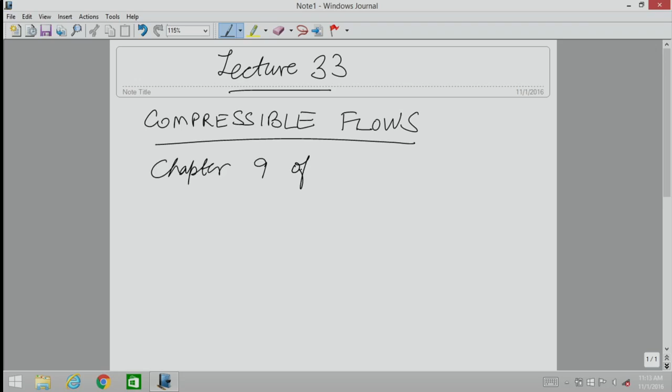Now this topic which I'm starting is compressible flows. This is basically chapter 9 of our book, and we'll be covering up to section 9.6. The parts later than that we will not be covering.

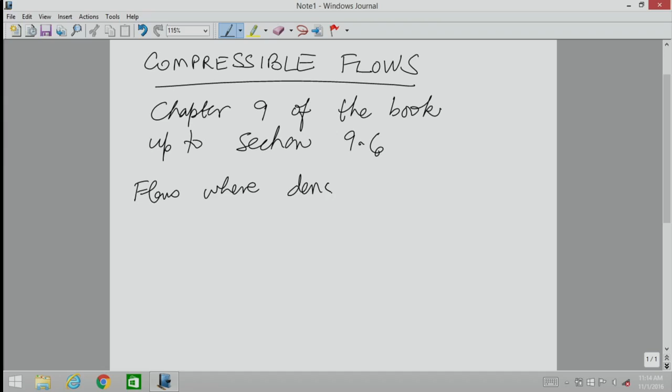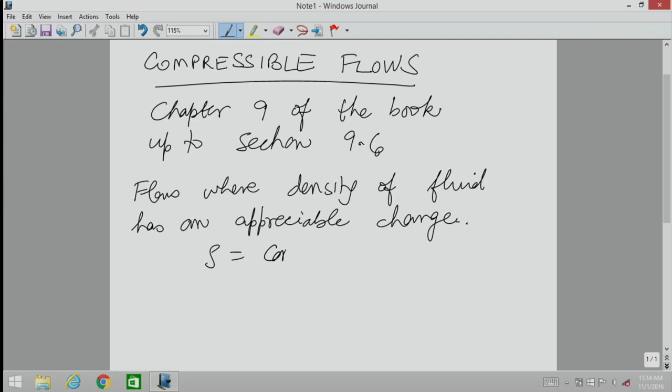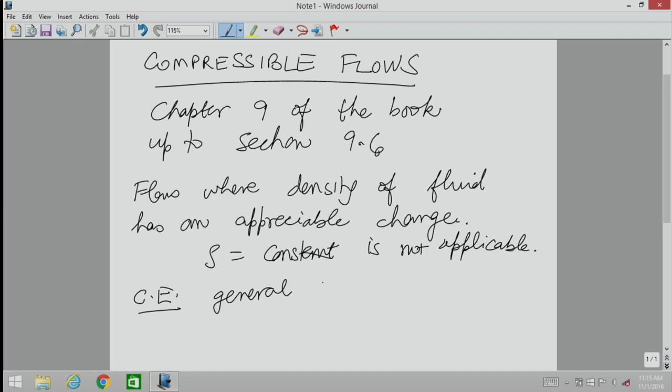Now, what do we mean by compressible flows? Compressible flows mean that flows where density of a fluid has an appreciable change during the flow, which means that density equal to constant is not applicable. So what is the first thing which comes to mind when I say density is constant is not applicable? Which equation do you think we need to modify? The continuity equation. So one of the first things we immediately think is that in this flow, the continuity equation, we have to look at the general form. Del dot V is equal to 0 is not valid.

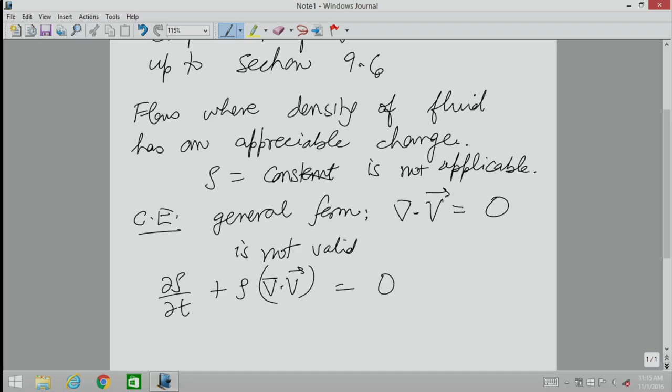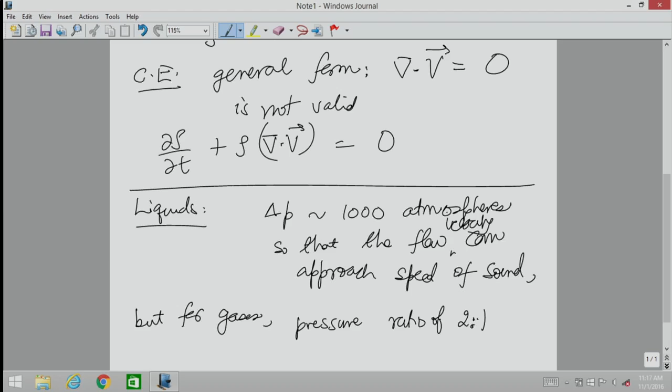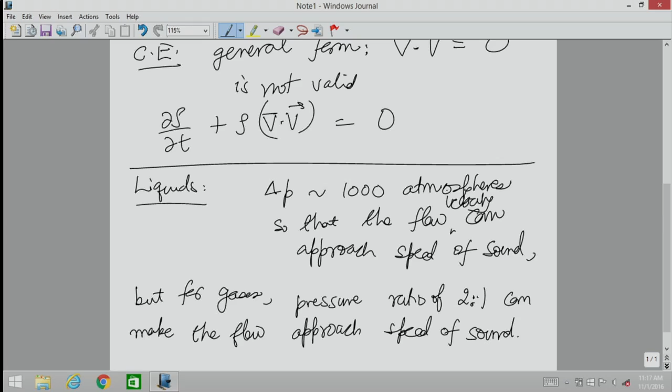Now physically, when we see this, if we look at flow of liquids, we need a pressure drop or pressure change of about the order of 1000 atmospheres so that the flow can approach compressibility in liquids. It will be difficult, or change of density occurs under much harsher conditions. But in gases, if the pressure drop or pressure ratio is about 2:1, it can make the flow approach the speed of sound, and which will make it become compressible.

Now, what speed of sound has got to do with this will become clear by the end of this lecture. But what we find is that there are two effects mainly in compressible flows which are not observed in incompressible flows. There are two of these things which we will find in compressible flows which we don't find when density is constant. The first of these we refer to as choking, and the other one as shock waves, which again we will explain as we go through this topic.

In choking, what we find is, suppose there is a tank and there is a pipe connected to this. If you want to create a flow in the pipe, how do you create that? You reduce the exit pressure. If you reduce the exit pressure, the flow from the tank will start flowing in the pipe. Now you keep on reducing the pressure, and that is where the ratio of pressure comes in. There's an inlet pressure, there's an exit pressure. Now what you find is, if the Mach number in the flow -- because the flow speed increases, the velocity of the flow increases, and as you reduce the pressure further and further, you would expect the velocity to keep on increasing. Now what we find is, once the velocity, assuming this is one-dimensional flow, once it approaches the speed of sound...

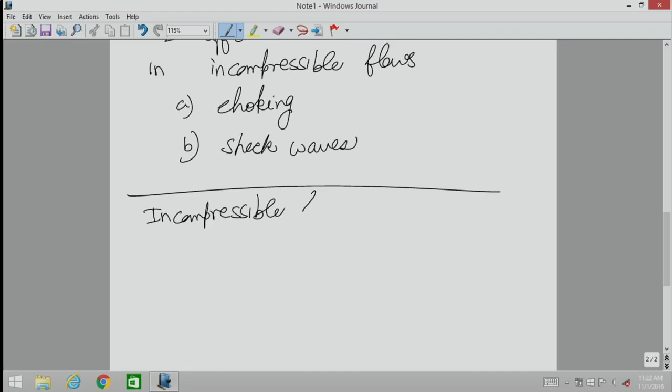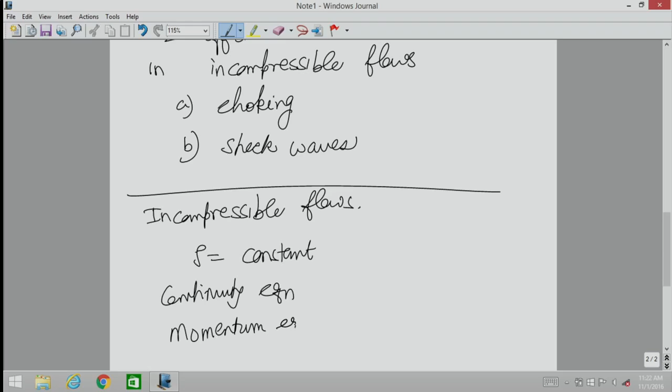So now let us look at our equations in incompressible flows. For incompressible flows, density was constant, so its value was known. There was a continuity equation and a momentum equation, and together these equations gave us the value of V and P. So far, we found the values of velocity and pressure from continuity and momentum equation.

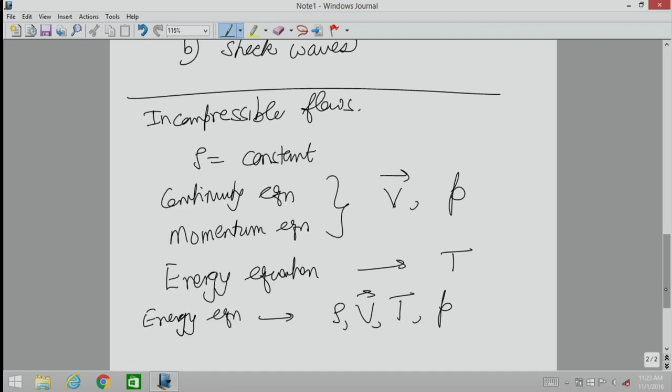Density was constant, and we did not do this, but if we want to find the expression for temperature, we will get that from the energy equation. In incompressible flows, because density is constant, the energy equation is a separate equation for T. The energy equation contains density, velocity, pressure, all these terms. But the equation for velocity and pressure does not contain T. So therefore the equations are decoupled. We can first solve for velocity and then solve for temperature.

But this will not happen when the flow is compressible. Now, as opposed to this, when we look at compressible flows...

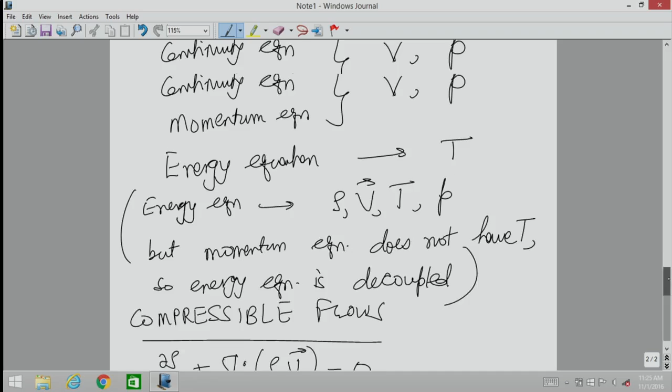I think I wrote the wrong equation there, plus. I should probably correct the starting thing. I think I wrote something wrong there. Please correct this, I made a mistake. It should be del dot rho v. On the first page of the lecture, I wrote it as rho times del dot v. With that, it should have been capital D rho by Dt, not small. So this has to be corrected on the first page also. And here we have del dot rho v is equal to 0.

So now what happens is...

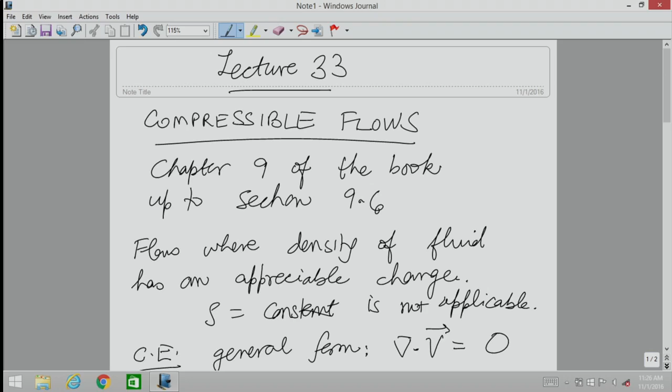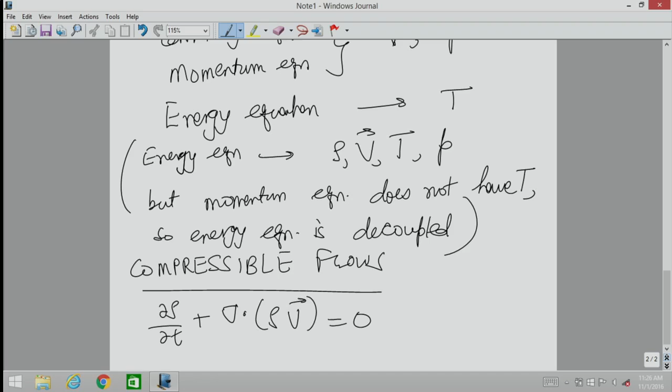So now let's see, if we look at compressible flows, we have this equation for density. This is one equation. Then we have the momentum equation, which will contain V and P, and we have the energy equation, which has an extra variable T.

So now if you look at it, you are short of some variables. Density is also a variable, along with pressure, velocity, temperature. So totally, counting them, there are 6 variables, not counting mu, because mu also depends on temperature, and where temperature changes, that will also come into picture. So we have 6 variables, and we have only 3 equations plus energy, which is a scalar equation, making 5 equations total. So you will need one more equation with these variables.

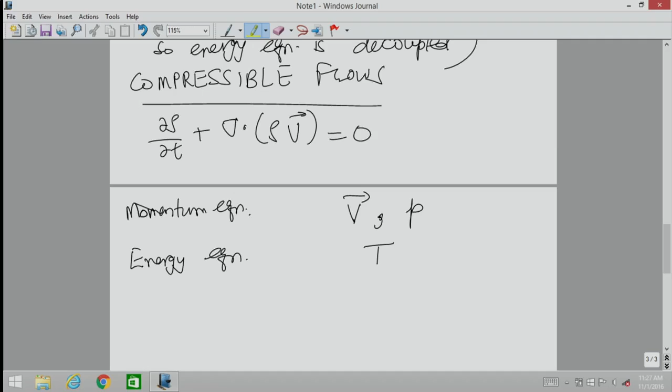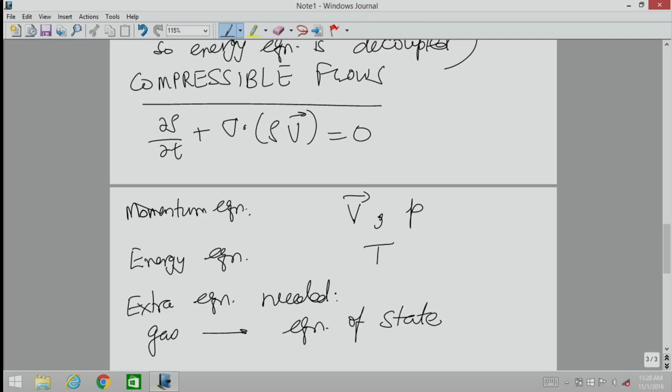And the final equation which we get, there is an extra equation which is needed. For gas flows, we get it from the equation of state, which you have seen in thermodynamics. If we assume that the gas is an ideal gas, then I can use P equals rho times R times T. So the extra equation which relates P and rho through temperature will be this equation.

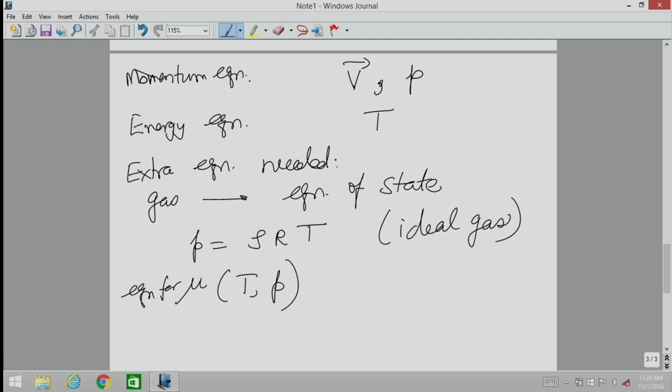Then if temperature changes are important, and pressure too, then we may also need an equation for mu as a function of temperature and pressure. Normally changes of mu with pressure are very low; the main effect is mu with temperature. This we may have to prescribe with another law, sometimes called Sutherland's law of viscosity, which we use. This again will have to be given, because now we keep in mind that as the flow is going, its temperature is changing, its density is changing, and they are changing by big amounts, not very small amounts. So when they change, we have to account for those. That means obviously life becomes more and more complex here.

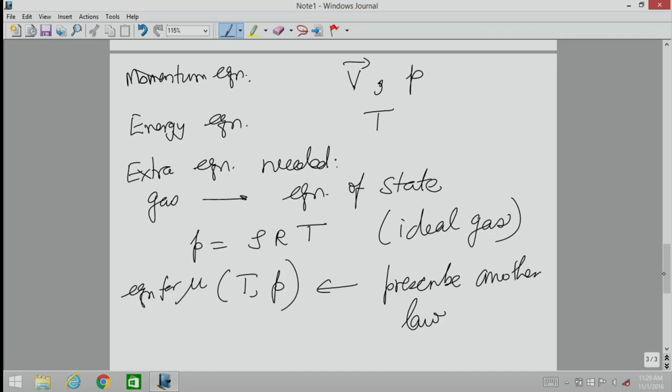So what we do is, because this comes, let's start with a brief review of thermodynamics, and we will assume ideal gases.

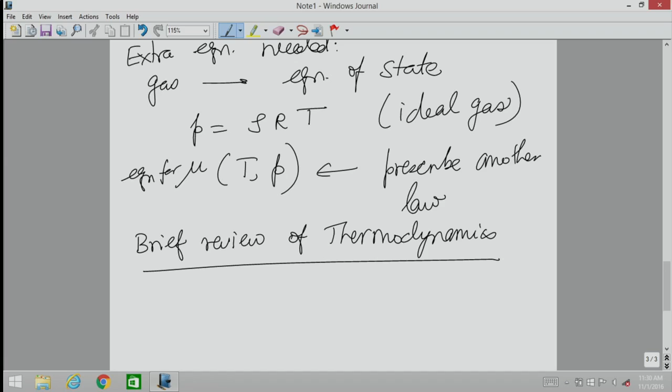You are doing a course on thermodynamics, isn't it? How good is it? No, but what all have you covered, you've done the ideal gases and all? First law, second law, enthalpy, internal energy. You get nightmares of these or no? Not too bad, I don't know. What symbol do you use for Cp upon Cv? K or gamma? K. Okay, good, we'll also use the same symbol.

So once again, when we talk of compressible flow, we'll assume we are talking of gases, and the gas we'll have in mind is air. So basically all problems will involve flow of air. It could be helium or nitrogen or carbon dioxide, anything. All you'll have to do is change the values of K, etc.

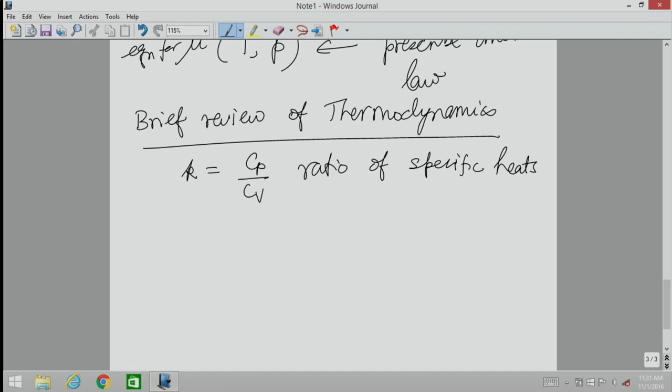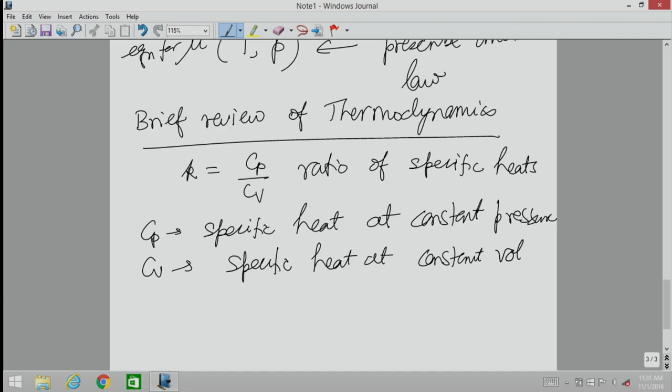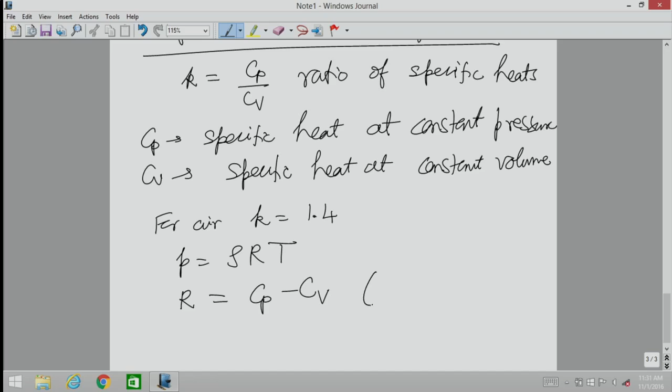But otherwise, first thing we do is we know this ratio of specific heats. What is Cp, what is Cv? Cp is specific heat at constant pressure... and Cv is specific heat at constant volume. And for air, K is equal to 1.4, and P is equal to rho RT. We assume it's an ideal gas, and we also have a relation R is equal to Cp minus Cv, which is a constant.

So now in real gases, K, Cp, Cv change with temperature, but in ideal gases they are constant. So we will assume ideal gas and we'll assume this to be a constant.

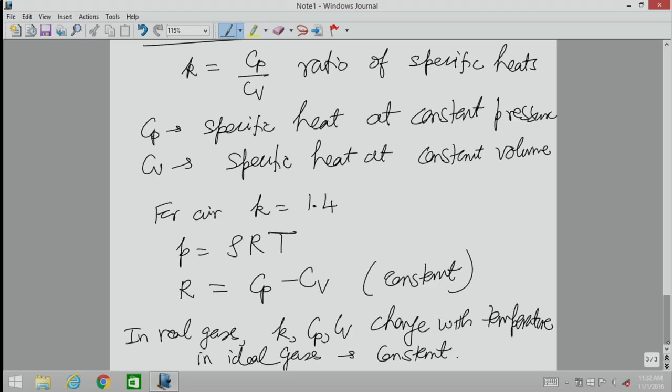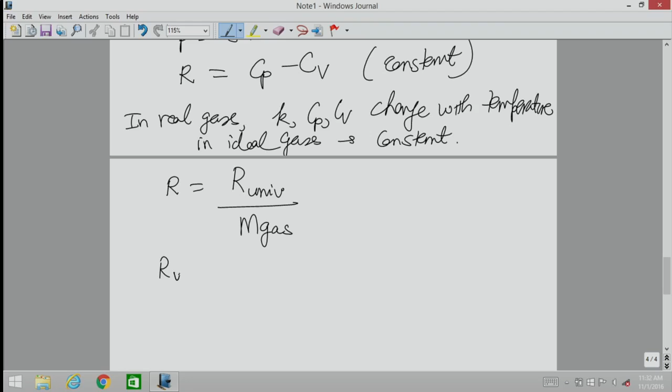Now here R, which we have written, R is equal to R universal divided by molecular mass of the gas. R universal is a number which is valid for everything, it's 8314 joules per kilomole Kelvin, and M is the molecular mass of the gas. And for air, R is equal to 287 meter square per second square Kelvin.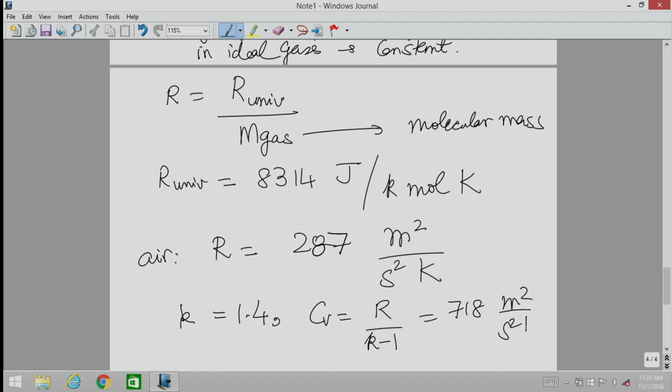K is equal to 1.4. We have this relation Cp upon Cv is equal to K, and Cp minus Cv is equal to R. So therefore we can work out Cv turns out to be equal to R divided by K minus 1. In terms of number, it is 718 meter square per second square Kelvin, and Cp is equal to K times R by K minus 1, so this becomes equal to K times Cv.

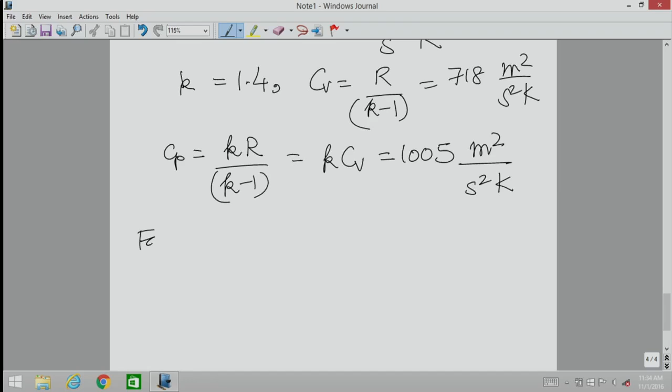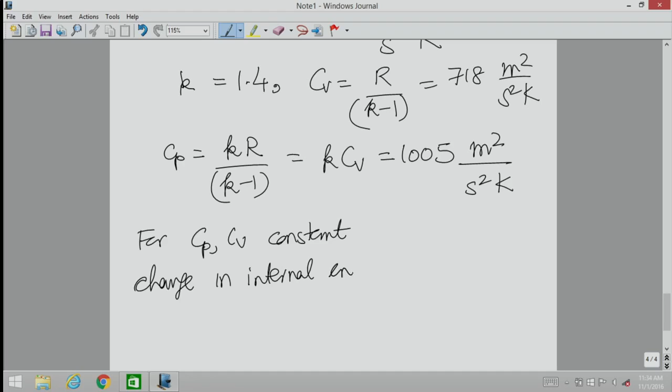Now for constant values of Cp and Cv, we have a relation: change in specific internal energy, U2 minus U1, can be written as Cv times T2 minus T1, and change in enthalpy, H2 minus H1, is equal to Cp times T2 minus T1.

And in case Cp and Cv are not constant, then I should probably put specific, so I'll use a symbol hats here. Then change in specific internal energy is equal to integral Cv dt, and change in enthalpy is equal to integral Cp dt.

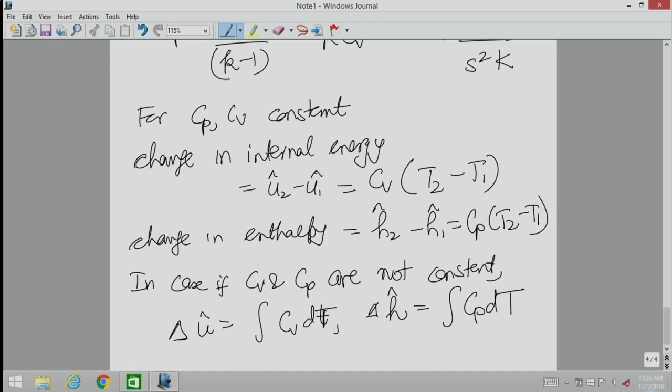So this is, I'm just sort of writing it from your thermodynamics course, I'm not teaching these to you. I hope the details of these expressions have been done by Professor Ravi when he taught you the thermodynamics course. Who is teaching it? Talukdar sir.

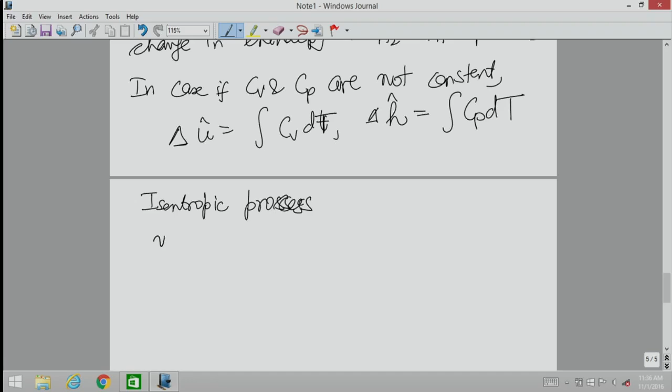Now we also define a process called an isentropic process, and when we talk of a reversible, an adiabatic process - what do we mean by adiabatic? A process in which there is no heat transfer with the surroundings. And if the process is reversible, meaning a slow change is taking place so that it can come back - if it's a sudden change, it's not reversible. Then a reversible adiabatic process is also isentropic, involving another thermodynamic property called entropy, and for this process delta S is equal to 0, where S is the entropy.

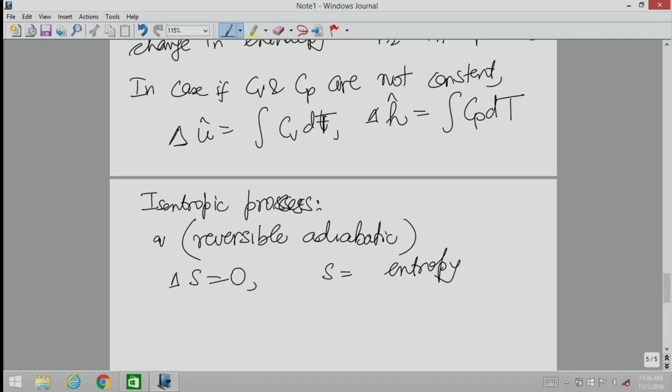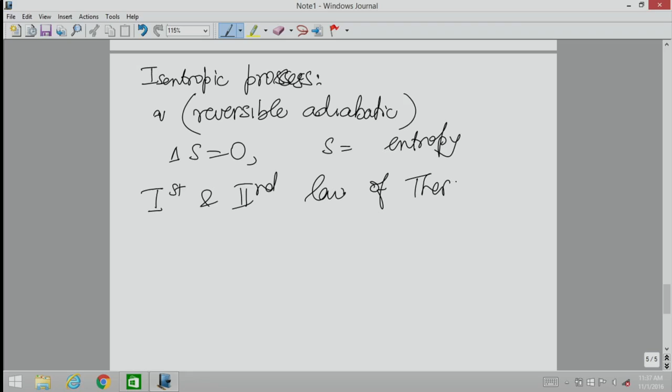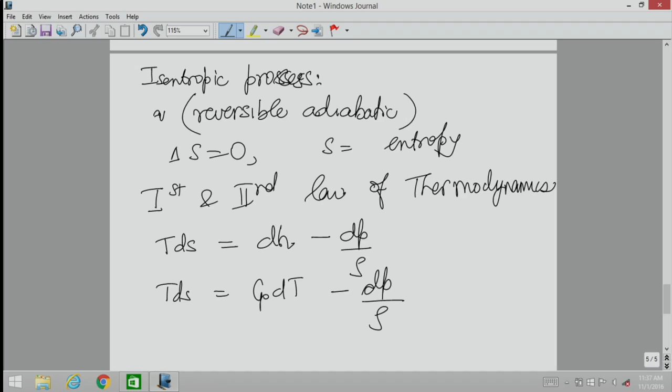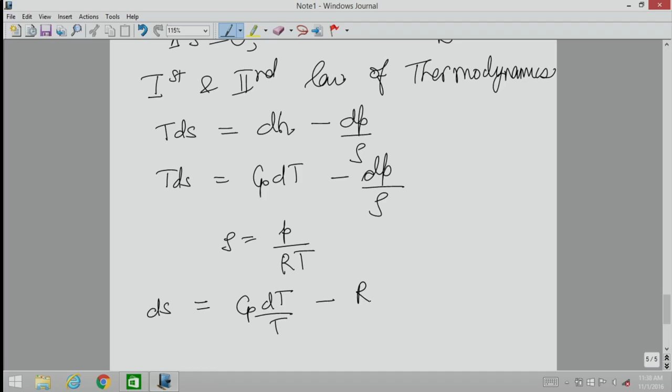Now from the first and second law of thermodynamics, they lead us to T times dS is equal to dH minus dP upon rho, for a reversible process. So we can write TdS is equal to Cp times dt minus dP upon rho. And for rho we can write P is equal to rho RT, so rho is P upon RT. So what we get from here is dS is equal to Cp times dt upon T minus R times dP upon P.

And when we integrate this, we get integral from 1 to 2 of dS, which gives us S2 minus S1. The change in entropy is equal to Cp times log of T2 upon T1, minus R times log of P2 upon P1, assuming Cp is constant. This is for an ideal gas.

And this we can also write in terms of Cv. This becomes Cv times log of T2 upon T1 minus R times log of... Now these two are identical equations. You can probably use the equations we have done, P equals rho RT, to get these things, and then also the relation between Cp and Cv we had worked out.

So from there you will be able to get this relation. These are basically just some things which are a recap from the thermodynamics course. And from here what we get is the change in entropy, and if we have an isentropic process...

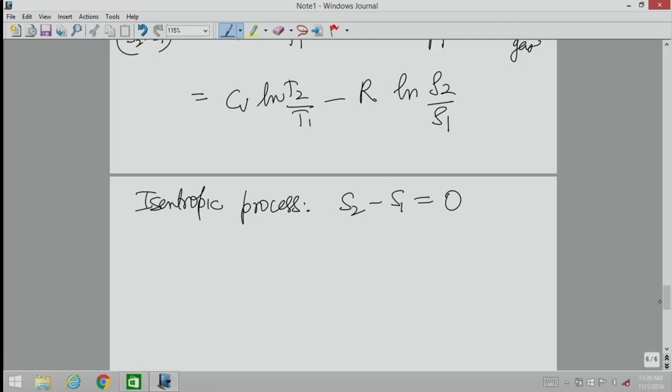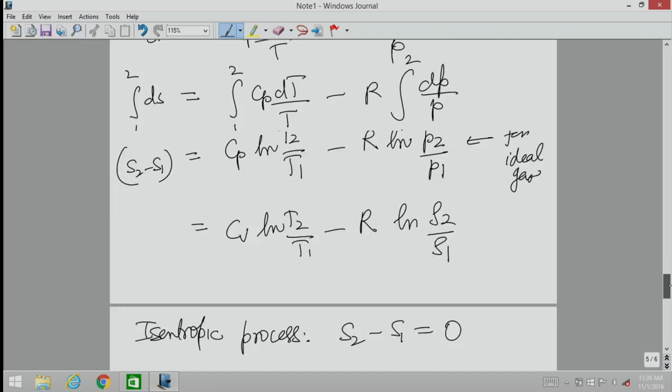In an isentropic process, S2 minus S1 is equal to 0. So once you put S2 minus S1 equal to 0, then you can find a relation between P2 upon P1, T2 upon T1, and rho2 upon rho1. You get this relation from thermodynamics: P2 upon P1 equals T2 upon T1 to the power of K by K minus 1, and this is also equal to rho2 upon rho1 to the power of K. So these are what you get for an isentropic process.

So from here what we get is that we can find the relation how pressure, temperature and density are related to each other. Now how this will come in a flow field is that we will look at flow in a small channel of varying area, and there we will see how as pressure changes what happens to temperature, what happens to density, and then using our relations of equilibrium we will apply this to the equation for velocity. That is what we will do.

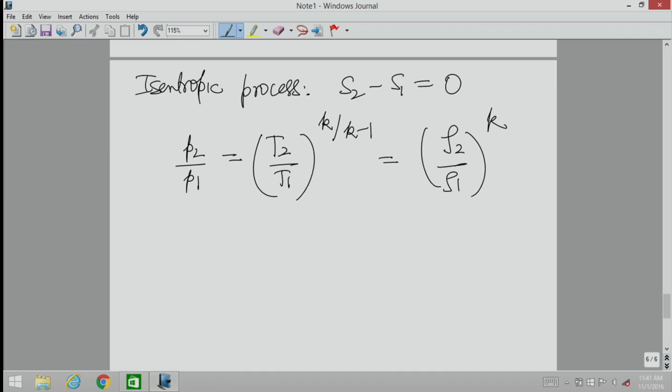Let's see now how to go about doing that. So here what we'll start off with, having seen this review of thermodynamics, is let me now talk about speed of sound.

Speed of sound is the rate of propagation of a pressure pulse of infinitesimal strength, if I create a pressure disturbance in the flow. I create a very small pressure disturbance. The rate at which this disturbance moves, if there is a still fluid - let's talk of this room - I create a small pressure disturbance by speaking. So now this pressure disturbance travels with a finite speed in the still fluid, and the rate at which this pressure disturbance moves is what we call the speed of sound.

And for this to be the speed of sound, the pressure disturbance has to be infinitesimal. That means even the smallest pressure difference which is caused, what is the speed at which it travels in a quiescent fluid? That is what we want to find out.

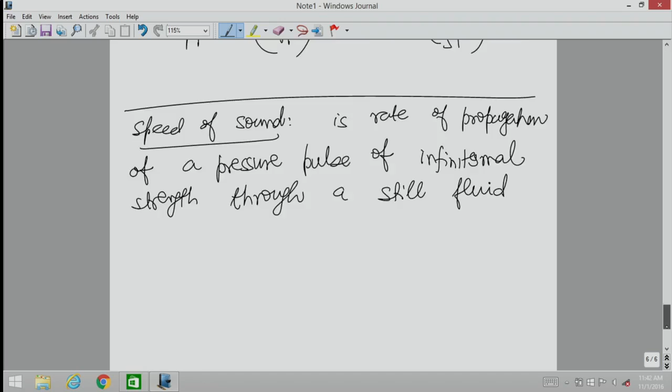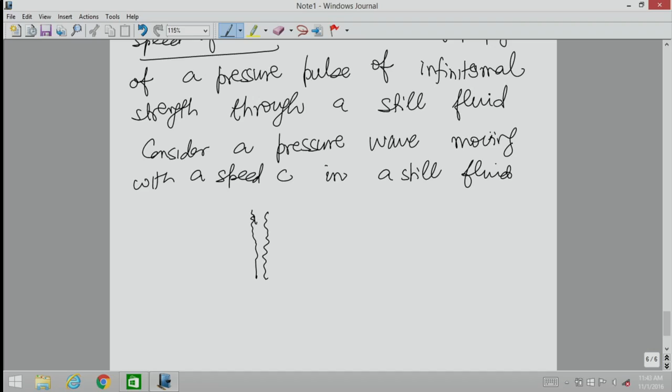So now let's see, what we do is consider a pressure wave moving with a speed c in a still fluid. So I show a small disturbance, which I call a pressure wave. This wave is moving in a still fluid. If it is moving in a still fluid, let us say the pressure - this is a wave which is traveling like this. Upstream of the wave, this has not so far affected the fluid: pressure is P, density is rho, temperature is T, and the speed of the fluid here is 0 because this is traveling in a still fluid.

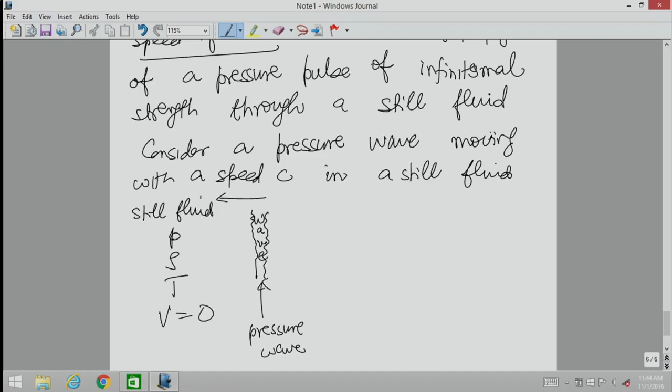And because once the wave crosses this, it will create some disturbance. So let the pressure change which comes in because of the traveling of the wave, let it be P plus delta P, rho plus delta rho, T plus delta T. So once the wave travels, these changes are caused in the fluid because of the wave.

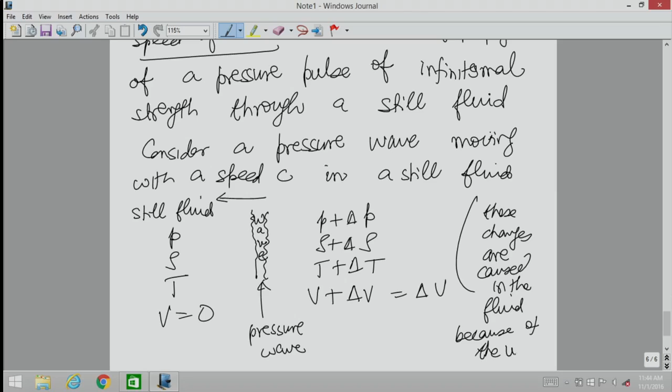So to analyze this, what we do is we choose a control volume which encloses the wave, and this pressure wave is traveling with speed c, which we want to find out.

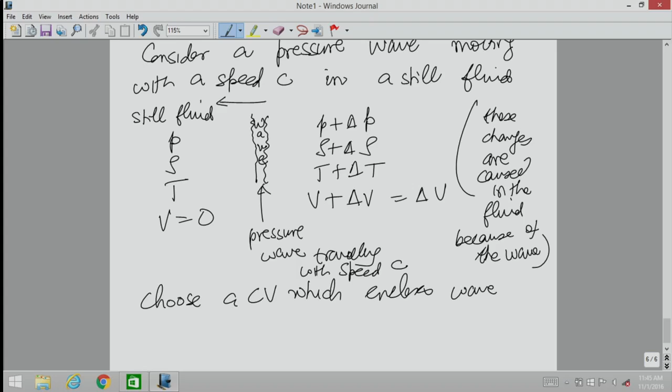Now we choose a control volume which encloses the wave, a small rectangle type control volume consisting of the wave. Now because the wave is moving with speed c, if we want to make the flow steady, what do we do?

We make our control volume travel with the wave. We have seen this before: if there's a boat traveling in still fluid, if we place ourselves on the boat, the entire scenario becomes steady. So we choose a control volume which encloses the wave and travels with the wave. The control volume is attached to the wave, and the reason we do this is to make the flow steady.

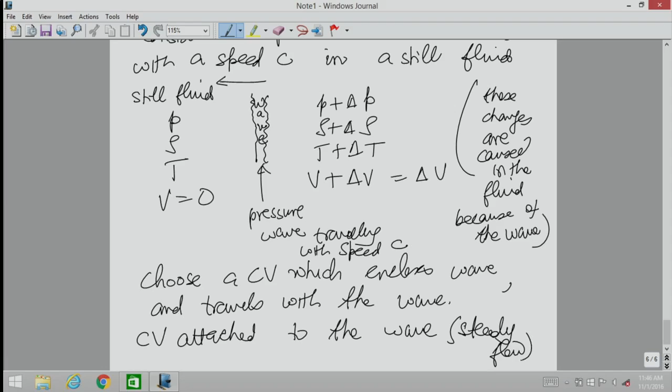So now in this control volume, this wave is now steady. The pressure is still P, density is rho, temperature is T. What happens to the velocity in this control frame? Earlier the velocity was 0, but now because we are in this frame, the velocity becomes equal to c in this direction.

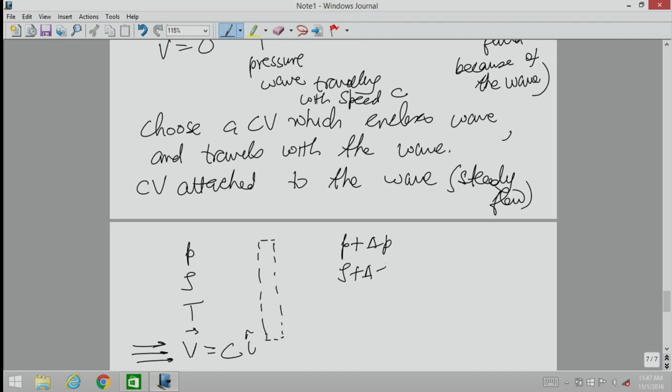And here, this is P plus delta P, rho plus delta rho, T plus delta T. What happens to the velocity here? It was delta V. So in this frame, the velocity becomes equal to C minus delta V in the i direction. It is delta V in this direction, to that we add C, so it becomes C minus delta V. Initially it was minus delta V i.

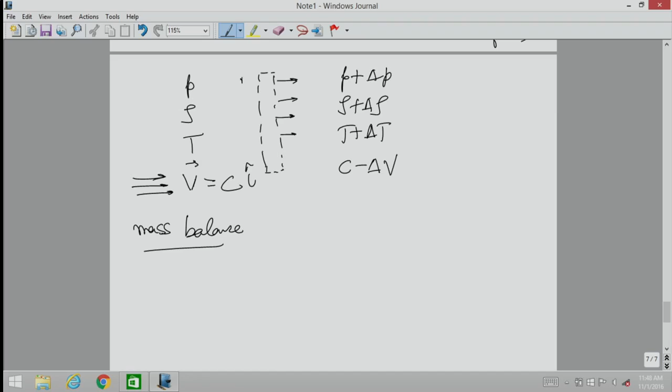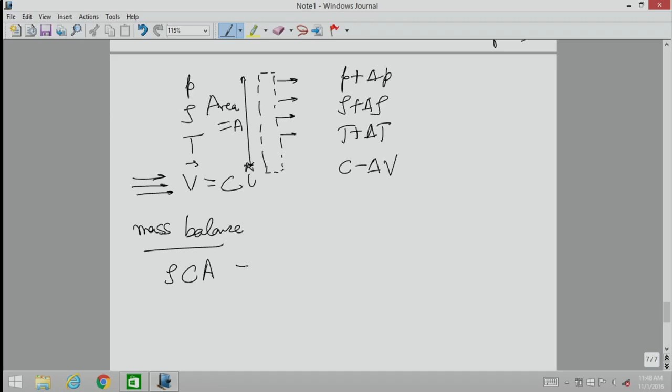So now if we choose it like this, this is our control volume, so we carry out a mass balance. Let's say this area is A. So what does the mass balance tell me? Rho times C times A is equal to rho plus delta rho times C minus delta V times A.

Whatever mass is coming in is the mass going out. We are just assuming a 1D control volume, a very thin control volume. So from here what we get is rho CA is equal to rho CA minus rho delta V A plus delta rho CA minus delta rho delta V A.

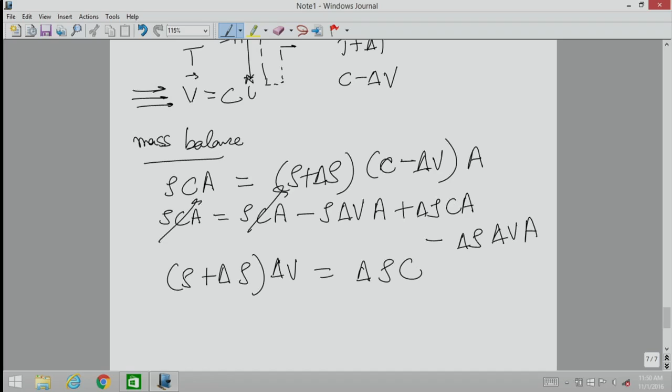So from here, rho CA and rho CA will go away, and I have rho plus delta rho times delta V is equal to delta rho times C. So from here, the change in velocity happening in the fluid will be equal to C times delta rho by rho plus delta rho. Next we will apply the momentum equation.

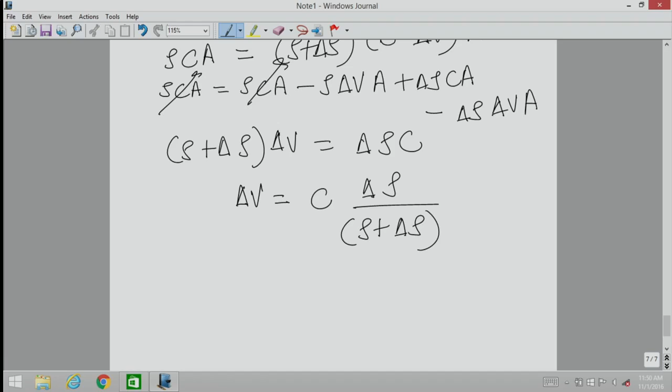C is the velocity of the wave. Sum of forces on the control volume is equal to m dot times... Now if I draw my control volume here like this, this is rho, this is C, and this pressure is P. This is rho plus delta rho, C minus delta V, and pressure is P plus delta P.

So therefore what I will get here is P times A minus P plus delta P times A. This is equal to m dot, which is equal to rho AC times V out. V out is C minus delta V minus C. So this is what the momentum equation will give me. M dot, I've taken m dot common, this is how we have done earlier also.

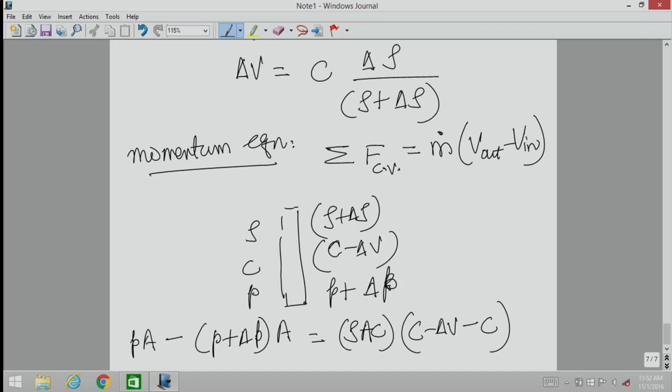So that gives me rho AC, and V out is C minus delta V minus C, and this is equal to this thing. Now again A and A will cancel out, and from here this simplifies to delta P is equal to rho C times delta V.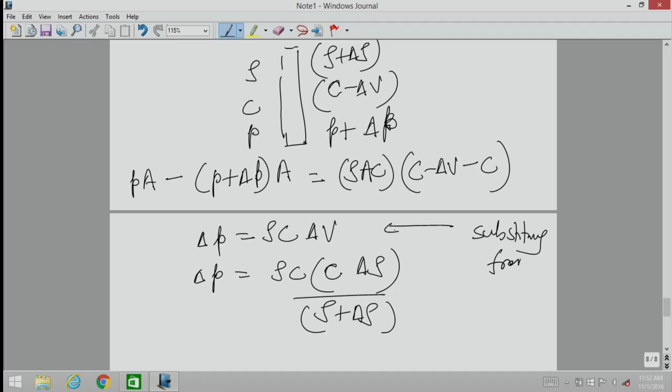In delta V I put in the earlier term, I get C times delta rho upon rho plus delta rho. This is substituting from the continuity equation. We get this. So from here, what we get is an expression for the speed in terms of the variable is equal to delta P by delta rho into 1 plus delta rho upon rho.

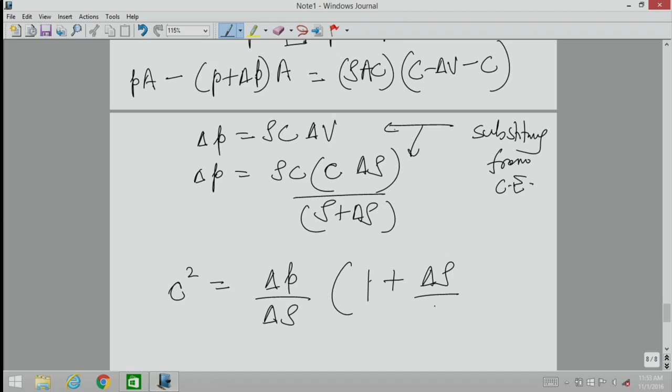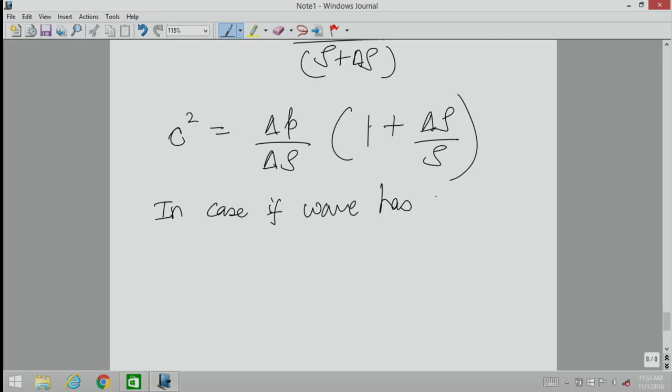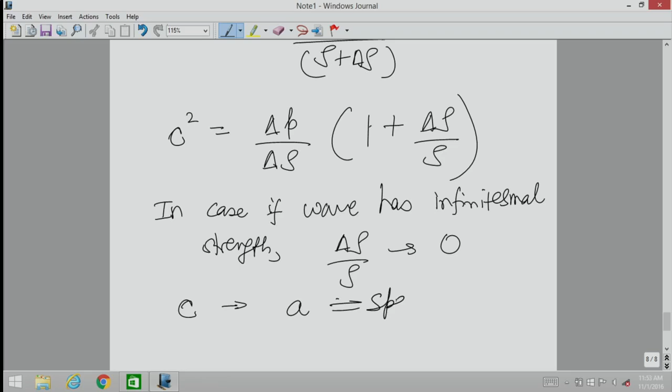So this is for a general wave of a general pressure disturbance. Now, in case the wave has infinitesimal strength, meaning the disturbance is minimal, then delta rho upon rho will approach 0, and the speed of the wave will become A, equal to the speed of sound. So from here, A square is equal to... this term will become 0, and c will become equal to the speed of sound.

So A square, if we call the speed of sound A, then A square is equal to delta P by delta rho. That means if a disturbance is traveling in a still fluid, the pressure upstream was P, and because of the disturbance following it, pressure becomes P plus delta P. That change in pressure divided by the change in density, in the limit, becomes equal to the speed of sound.

So what we have is A square is equal to... sorry, I wrote that wrong, it should be partial, I put in the wrong symbol here. A square should be equal to partial P by partial rho.

Now, when we say partial P by partial rho, the question is which variable do we keep varied, which variable do we keep constant? Because it's a partial derivative. Actually, a historical mistake was that the same formula had been derived by Newton, and when he talked of the speed of sound, he got it as partial P by partial rho, but what he assumed was that as the wave was moving, the whole process was isothermal, meaning temperature did not change. So Newton calculated the speed of sound by taking partial P by partial rho at constant temperature.

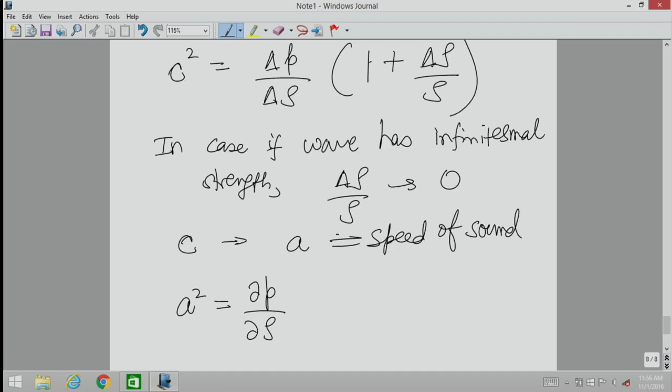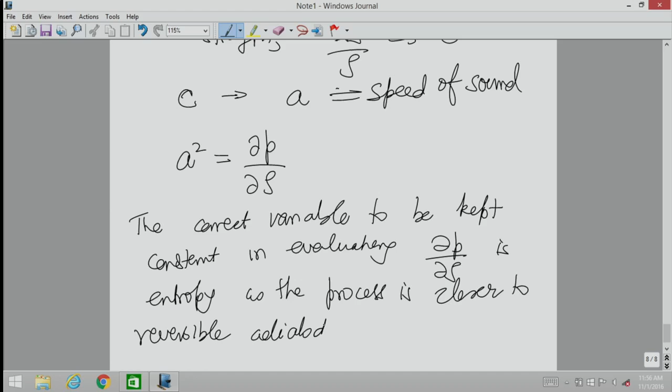So therefore this A square, which turns out to be partial P by partial rho, the correct variable to be kept constant in evaluating partial P by partial rho is entropy, as the process is closer to reversible adiabatic. So therefore, speed of sound in a gas is equal to partial P by partial rho at constant entropy.

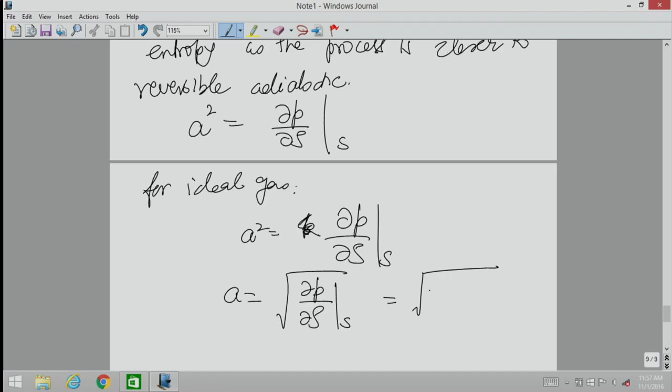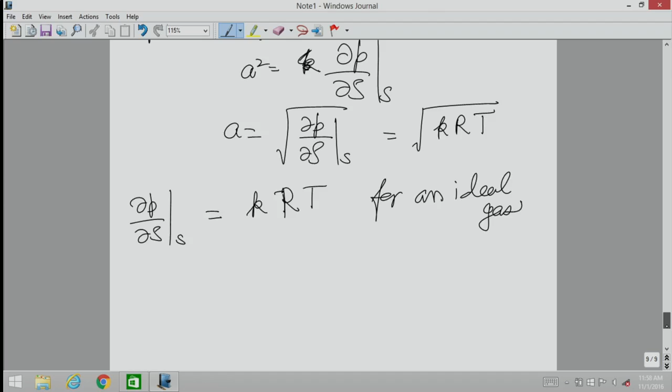Newton made this error, so now for an ideal gas we can easily work this out. For an ideal gas, A square is equal to K times... where does this K come from? A square is equal to partial P by partial rho at constant S, and this turns out to, for an ideal gas, if you calculate partial P by partial rho at constant entropy, equal kRT. So therefore, for a perfect gas, speed of sound A is equal to square root of kRT.

So this is how one works it out. Let's say for air at 20 degrees centigrade, A is equal to 340 meters per second, and if we go to a height of 15,000 meters, the temperature there is something like minus 56.49. I'm just copying these numbers, and there you get A equal to 294.39 meters per second. So it changes with temperature, going like square root of the absolute temperature. Even at very high heights, it just goes down to about 300 meters per second or so.

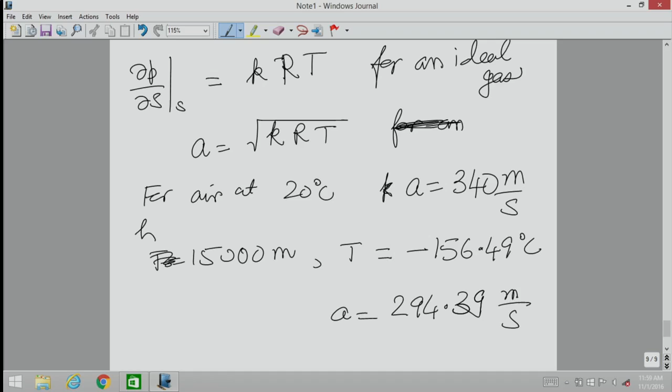Now for solids and fluids or liquids, there is a property called K, which is called the bulk modulus. You may have seen this before, and what we can show is A is equal to, I am calling this capital K, square root of capital K by rho, or square root of B by rho, where B is the bulk modulus. Of course, we will refrain ourselves only to gases.

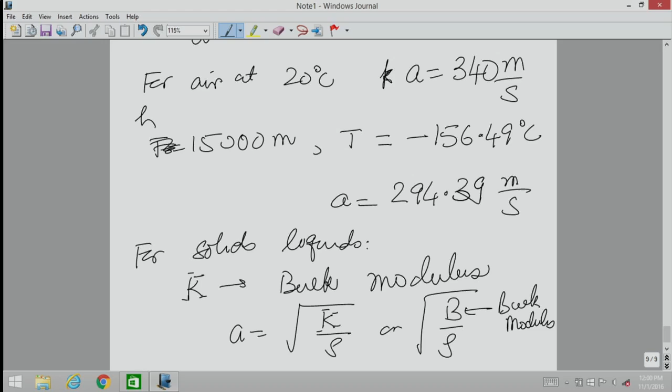So in the next class, I'm going to continue from this. But somewhere it gives you an idea where, when we talk of density changes, we get speed of sound. And that speed of sound basically comes from this relation, partial P by partial rho, the square of that is equal to, or A square.